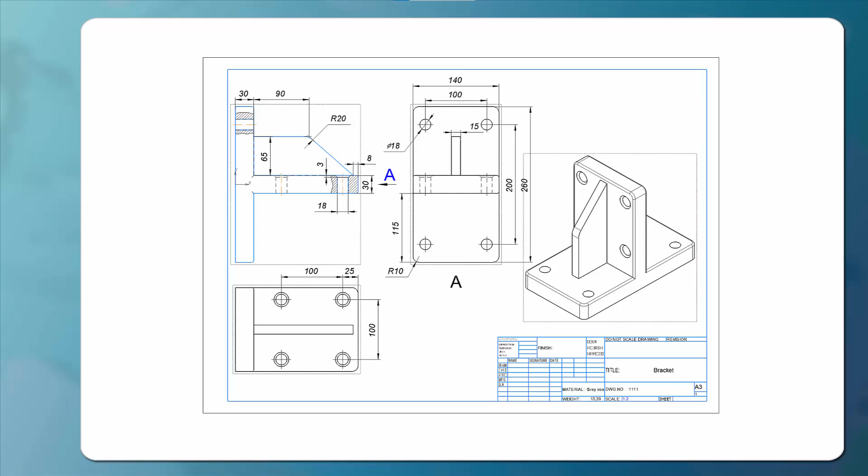Let's add dimensions. You can find all commands for adding dimensions in the Dimensions toolbar. However, in most cases, you can use the Smart Dimension command. It allows you to create linear, diameter, radial, angular, and other types of dimensions. We'll primarily use the Smart Dimension command.

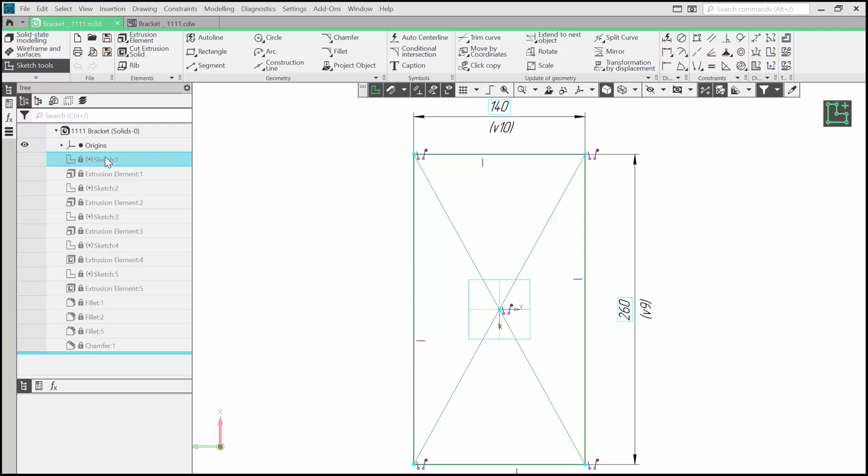Users often encounter a problem that I want to tell you about. A user creates a dimension, then changes the model. The drawing is rebuilt, but the dimension stays the same. The reason is that the parametric mode was turned off.

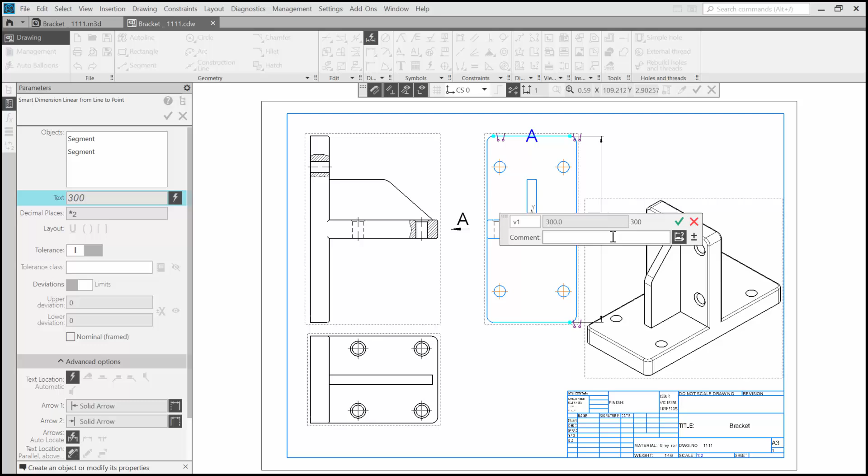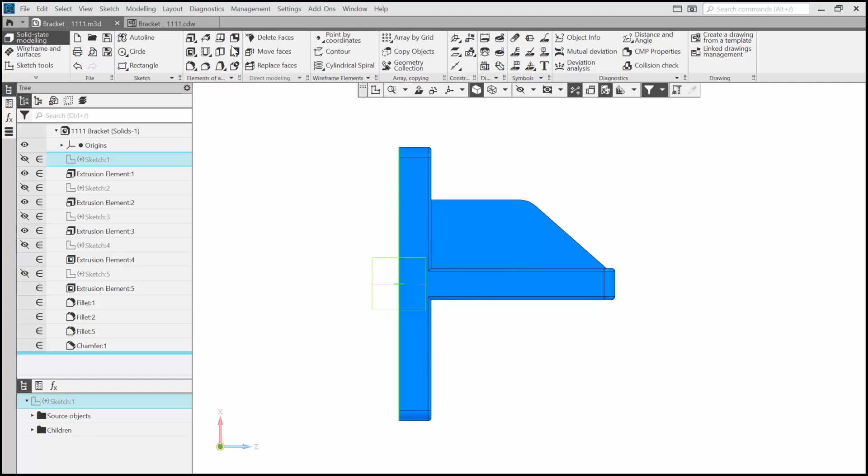Let me remove this dimension and turn on the parametric mode in the quick access bar. Let me add the dimension again. Notice that now you can see the panel where you can specify the value. Let's check the result. Change the dimension in the model. Save and return to the drawing. This time the dimension has changed according to the model changes.

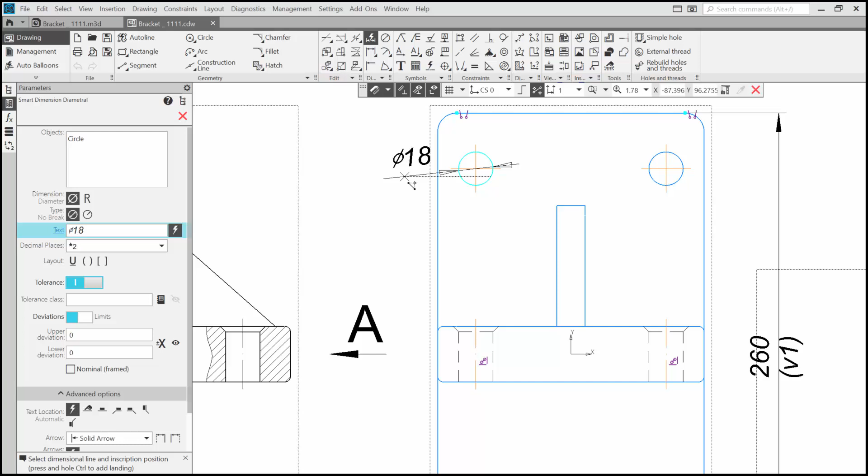Let's add a diameter dimension. Click Smart Dimension. To create a diameter dimension, hover over the circle until the circle turns turquoise. If you select a point of the circle, the command will start creating a linear dimension. We don't need this. Click the circle. Try moving the mouse in different directions to see how the dimension line changes.

If you press the Ctrl key, the dimension's position will change, and if you hold down Ctrl and rotate the mouse wheel, the dimension will rotate as well. Click to place the dimension in the drawing.

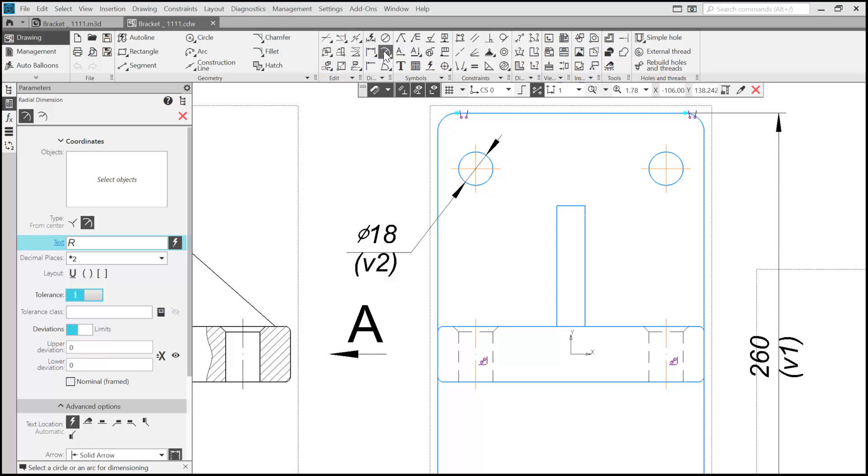Create the radial dimension. This time let's use the radial dimension command. Click the fillet. Note that here the same rule applies. The object needs to turn turquoise. Click to place the dimension.

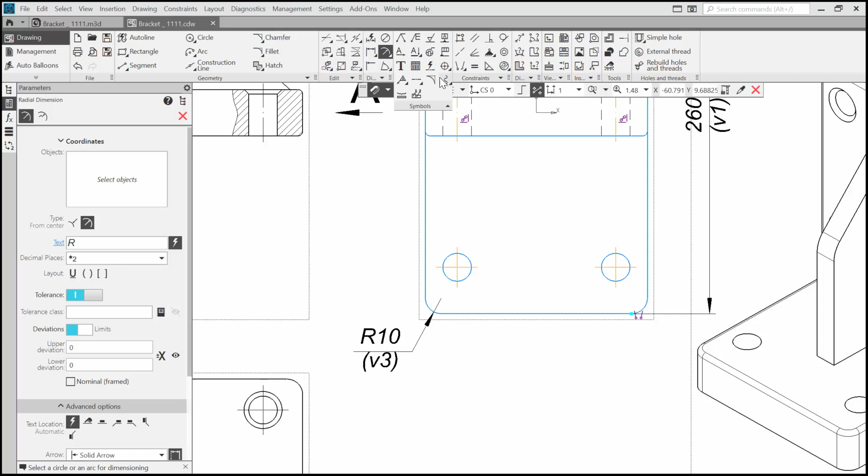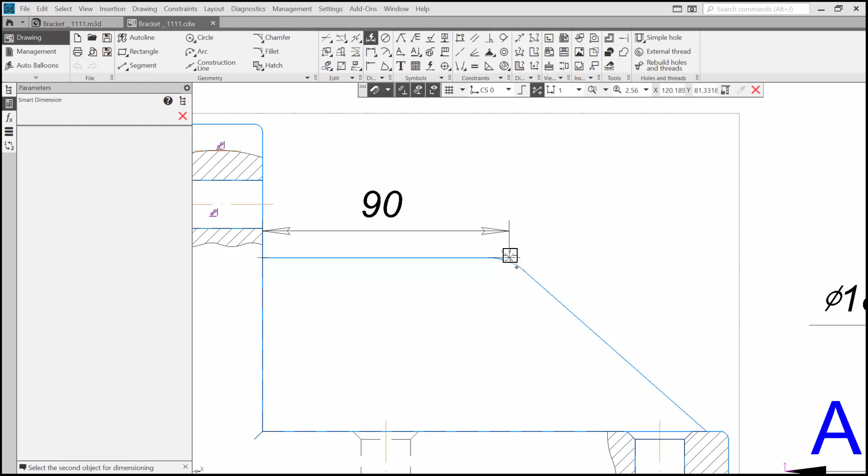To add a horizontal dimension to the rib, we need a virtual intersection of its lines. Start the Conditional Intersection command in the Symbols toolbar. Select the rib segments. Complete the command. Now we can create the dimension using Smart Dimension. Add the linear dimension without interrupting the command.

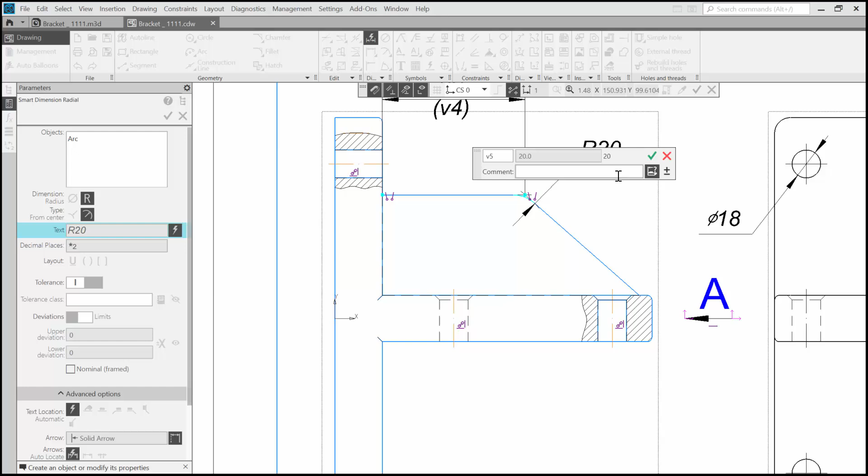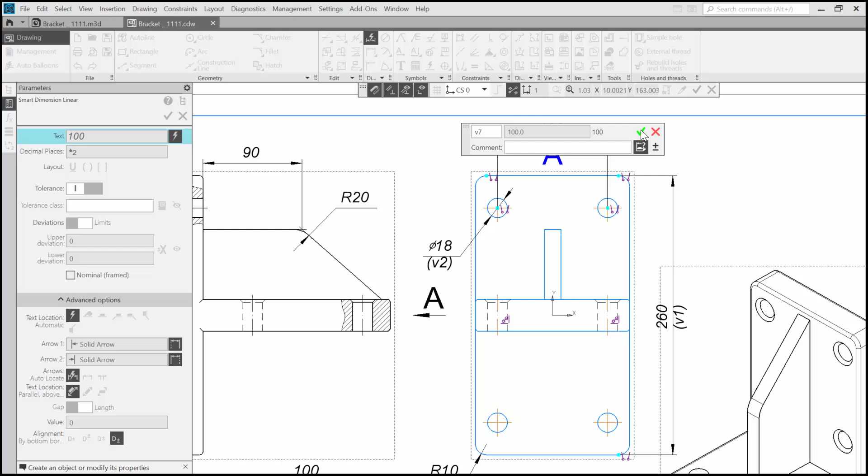Add the dimension between the holes in the top view. Select the centers of the circles. Notice that when you select objects in a non-current view, the view becomes the current one. Create the dimension between the holes in the right view. And add the horizontal dimension.

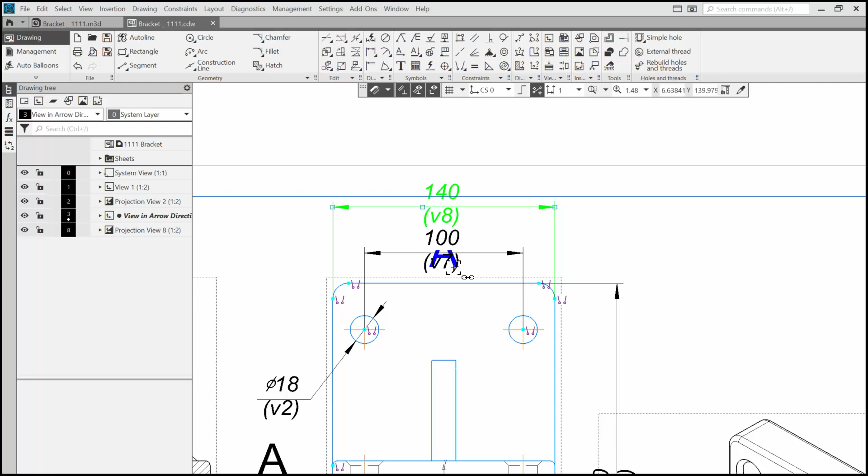Don't worry about the placement of the dimensions right now. You can move the dimensions by dragging the characteristic points. You also can move the view and the view label.

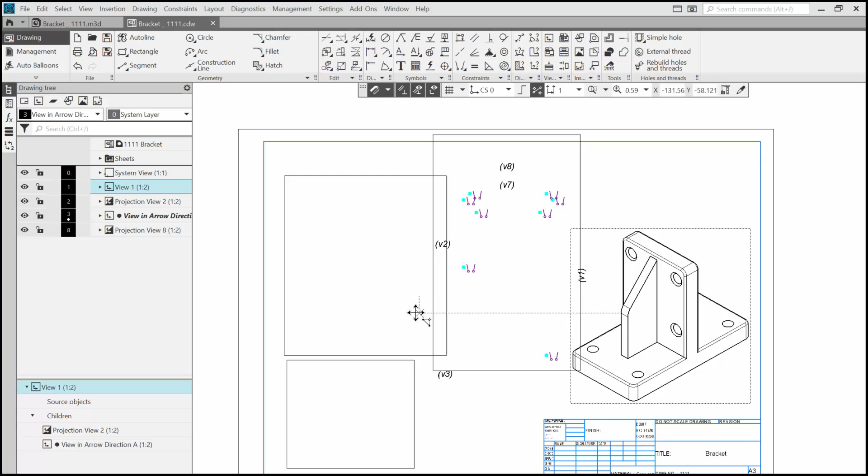I can't move the objects freely now, because snaps are active. I could turn them off, but in that case, new objects wouldn't be connected to the other drawing elements, and the drawing wouldn't be parametric. So I hold down the Alt button to temporarily disable the snaps while I'm placing the objects. Add the remaining dimensions.

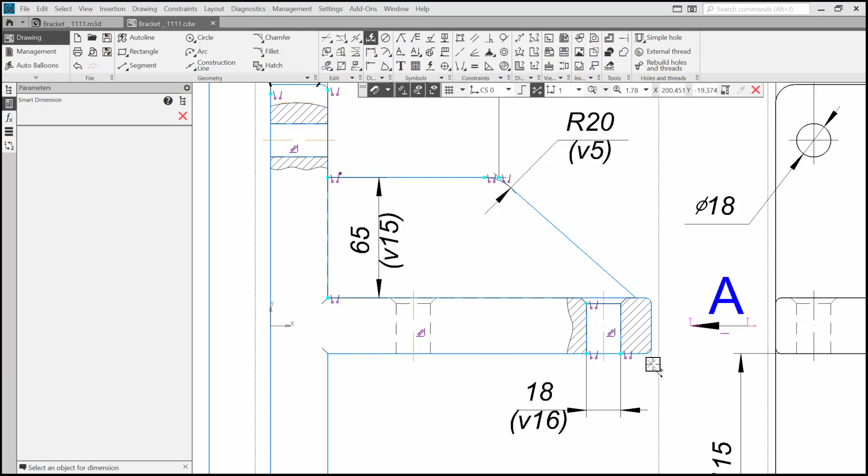Note that when creating a dimension based on 2 points, you can get different dimensions depending on the position. Make sure you create the desired dimension.

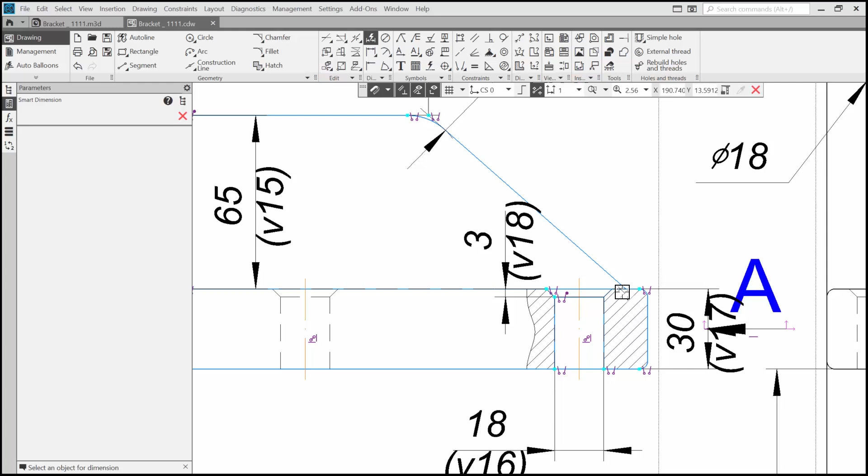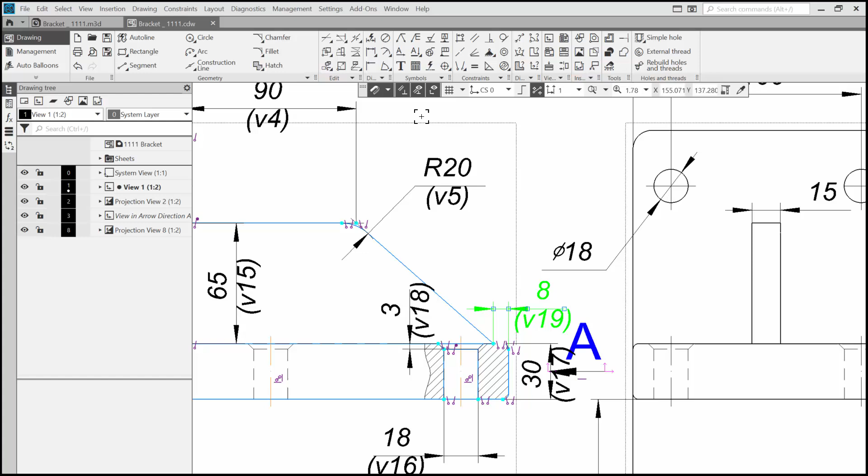If you're not satisfied with the dimension position, you can change it using the characteristic points. The variables under the dimensions are in the way, so I'll turn off the Display Constraints option to hide them. Let me move some elements to adjust the drawing.